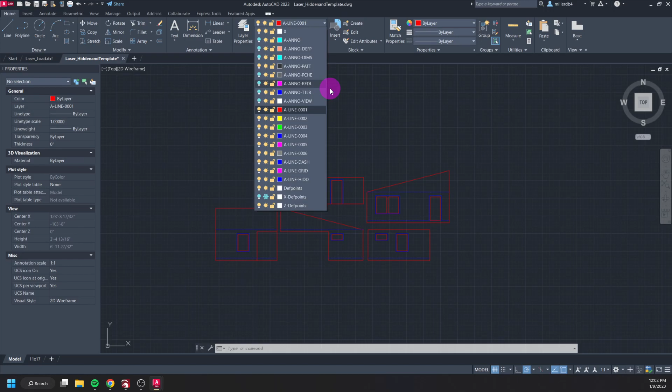So first off is anything that might be hidden or turned off. If you have a layer's visibility set to invisible, so this little light bulb here would be blue instead of yellow, it's still going to get imported into LightBurn and it's going to potentially cause issues.

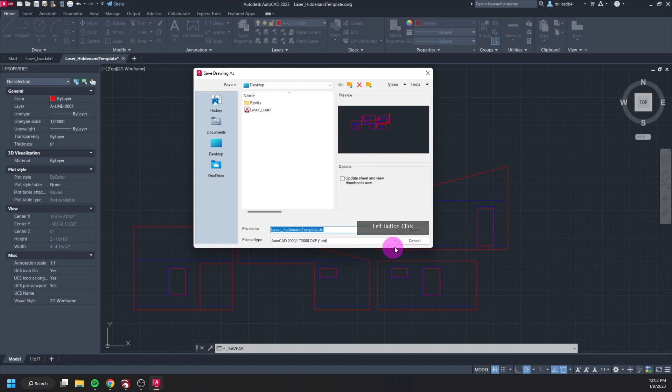So at the moment, I have this file here. I have it scaled. So again, if I click on a line here, we can see that this is just 1 foot and 3/32. So I have it scaled to the size I want. But if I save it as a DXF, so I come here to File, my little thing pops up on the other window, and then I save it as a DXF, I save my file, I come into LightBurn.

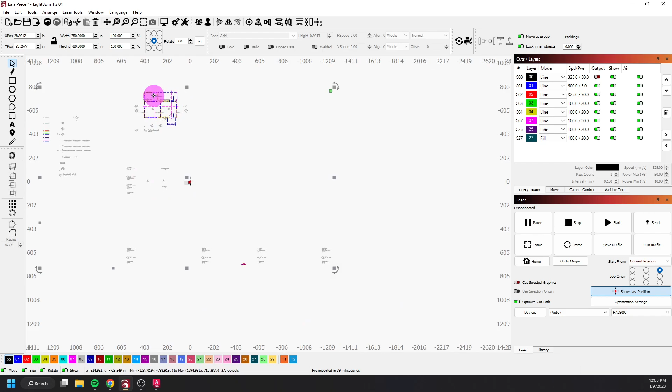File, Import, and I come to this file here that I know has issues, and I open it up. It did load in, but we can see here that it loaded in a bunch of line work too that was also kind of hidden. So as I was preparing this file and scaling it down, rather than completely deleting a lot of line work I didn't need anymore, I just went and turned those layers off, which I didn't think would be an issue. And then when I loaded it in, surprise, surprise, it is an issue.

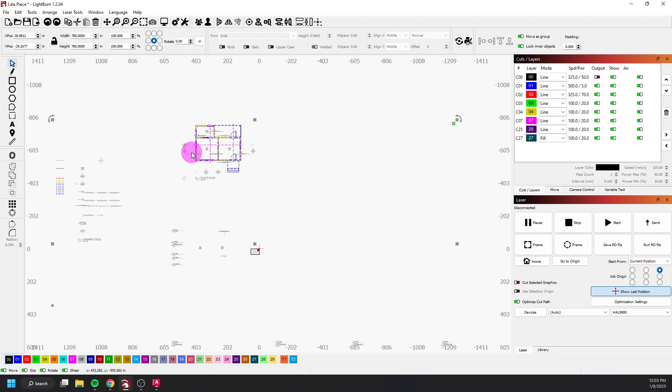So I'm just going to Control Z to undo my import. And then in AutoCAD, what I need to make sure I'm doing is that any layer in my project needs to be visible.

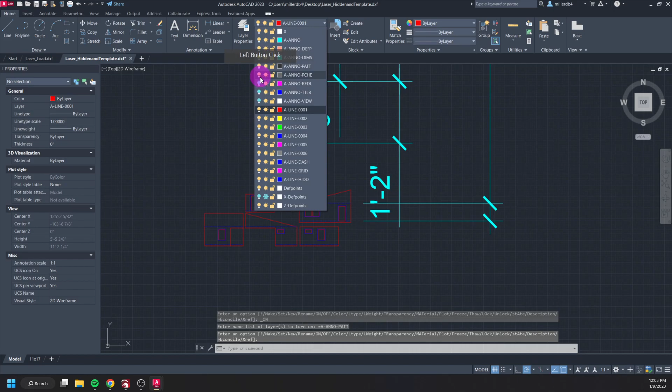So no layers can be hidden, so that way I can go through and just delete them. I just have to take anything I don't want and just completely remove it. And again, that's just as easy as highlighting it and deleting it.

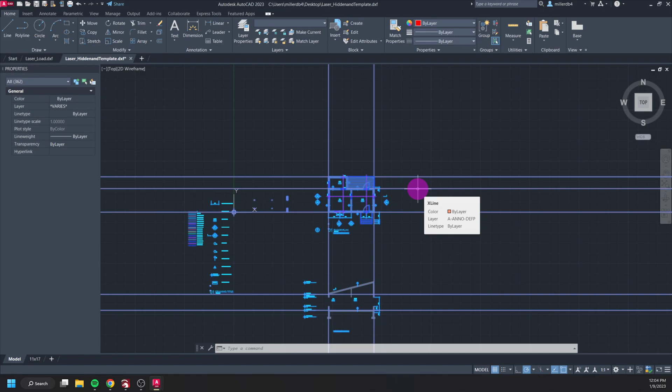Even your Defpoints lines or your Defpoints layers that are set not to plot, that's not going to transfer over to LightBurn. It's not going to comprehend what that plot turned off is. So we just need to make sure that everything is deleted.

One way that I can also double check that everything is deleted is if I do a zoom all. So if I do Z space A space, it's going to zoom in on everything in my drawing. Or if I double click the scroll wheel on my mouse, it's going to zoom in on everything that's in the actual file. So when I'm zoomed out like this, if I double click my scroll wheel, it zoomed me in purely on just my elevations here, which therefore to me is a signal that this is the only thing that's in my drawing file.

So now, since I went and deleted all of those invisible lines, if I save my file again and I just do an override on that original DXF file, in theory, it should then only import just this line work. And maybe you're catching on that since I said in theory, it's not actually going to do that.

So if I come back into LightBurn and I do another import, so File, Import, and I go into my laser hidden template here, when I open it up, it still is not really showing me my line work. It's clearly imported layers because these now have popped up, but there are these blue and this peach one here.

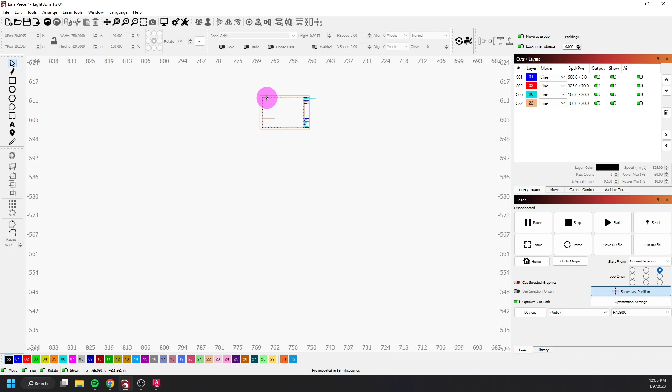And so if I zoom out, we can see that yes, it did bring my line work in, but it also brought in my template from Paperspace. So everything that I had in Paperspace also got imported into here. So I'm going to, again, Control Z to just undo that here in LightBurn.

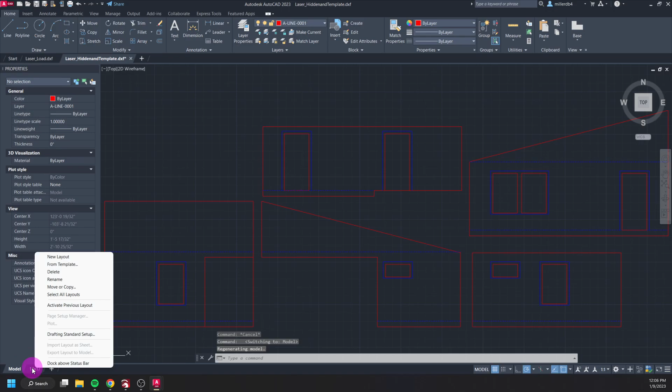And what you also need to make sure you've done in AutoCAD is that if you have any tabs here with a Paperspace kind of template of a title block and things, you're just going to need to right click and delete that Paperspace template. No matter what, there's always going to be a Paperspace template here called Layout 1. So you can see when I deleted my template, it just replaced it with this blank Layout 1.

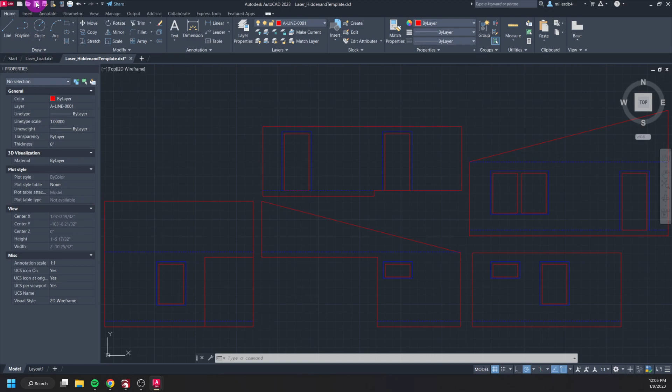But now this is going to import in correctly. So if I do a save and I come into LightBurn, and I can also click on this button here to do an import, and I go to my Laser_HiddenandTemplate. Now it's brought it in and it's just my line work. And another way that I know for a fact that it's done that is it's centered it onto, or kind of centered it at least, onto the actual work bed of the machine.

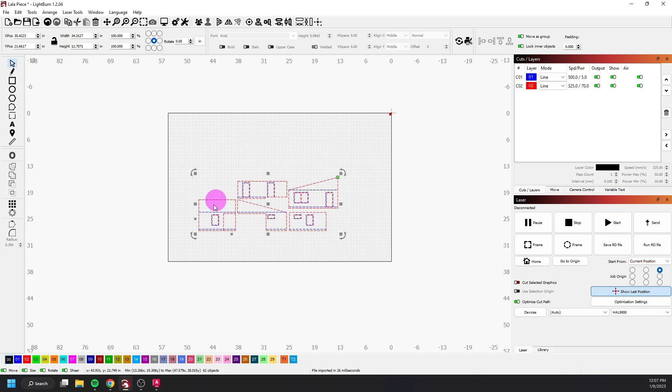So one thing also to just keep in mind with that Paperspace is that if you are working from a completely blank ACAD DWT template file, then you won't have that Paperspace issue to deal with. The reason why that was there is because I took this originally from a different template file that had that Paperspace title block.